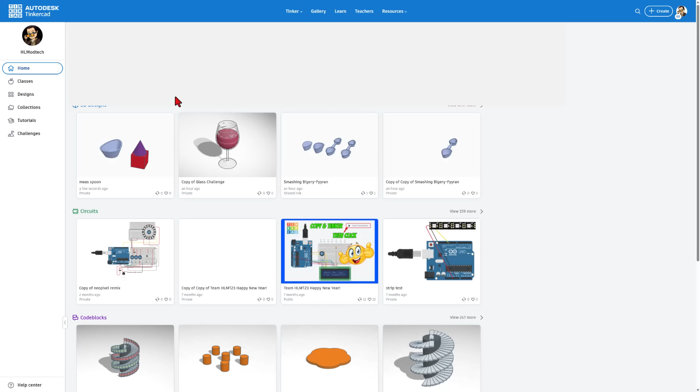On this page, you can only view them, but if you click on Printable V3, you can launch an image that is shared via Imgur, and you can click on this and you can download it and save it for printing. So with that completed, this is Tinkercad.com, the absolute easiest place to learn computer-aided design. It is 100% free. I simply choose Sign In with Google.

Today we're going to hit Create Brand New 3D Design. I like to start by naming projects. We're going to call this one New Tips. Now, if you've never used Tinkercad before, I have a playlist of Day 1 tutorials. You can find it with this bit.ly right here.

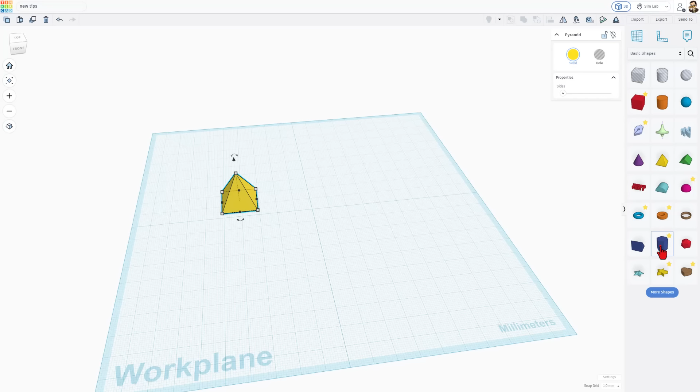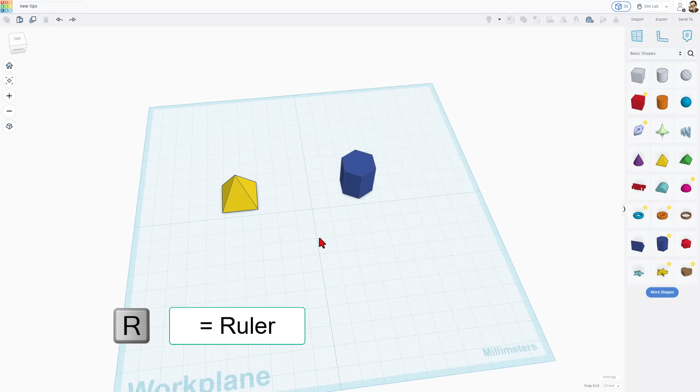There's also a ruler. I'm going to hit R for ruler. We could also bring it out from right there. I'm going to set it at this location. Now when I click the shape, it tells me the distance away, -1 and 24, and the size 20 by 20. Now if you click on this and set it to 0, press enter, it snaps to that location. Same thing here, 0 and snap.

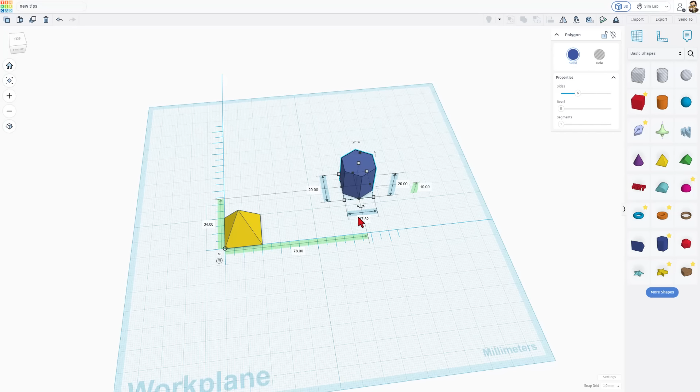You can also use midpoints. Now it shows the distance, half, 10 of the 20. Notice if I switch, now I can say that from this shape to the midpoint, it is 78 millimeters away from that shape because I lined those up earlier.

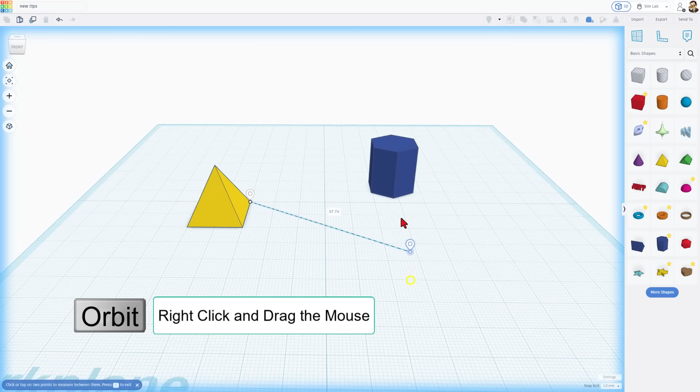Now recently we got a new tool called the tape measure. You can get to it with letter I. If I click on my shape, notice this is from a face and it goes to the center. You can also move to the corners, and then we can go to faces. I'm going to orbit so I'm looking underneath, see how I can get right to the center of that shape. And then you can just type numbers.

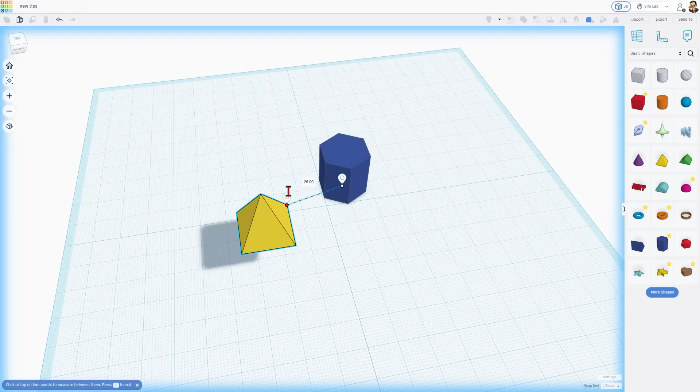Watch this, I'm going to type 60 and move it away a little bit. I can also make one of them the master, so see how that turned red. Now when I type 40, it moves that one. If I click this one, and I type 25, it moves the yellow one. So you can pick which one you want to do the moving.

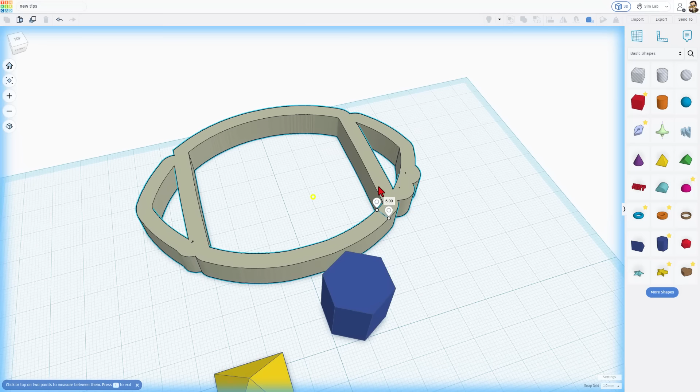I do want to quickly highlight that if you bring in an SVG or an STL, you can actually use this on that shape. Notice it lets me select edges, and I can go across to find what the distance was approximately side to side. Now I set this one to 5, so I knew that's what it was going to be, but it just lets you see how you can measure all sorts of things that we used to not be able to in Tinkercad.

As I wrap up, of course, I hope you find the printable shortcuts useful, and I'd love to hear what you think of the brand new Tinkercad tape measure.